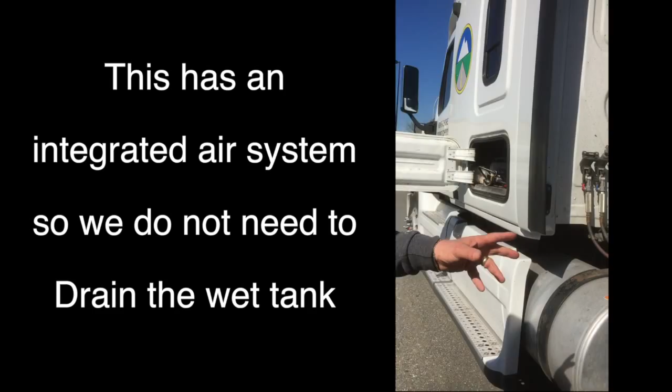As we walk back, one of the things we have to mention is this has an integrated air system, so there's no wet tank to drain. This is an integrated air system. There's no wet tank.

Now we're going to grab our pry bar, we'll shut that up, and we're going to open the hood. Here's how we open the hood. We just pull that like that, and then flip them like that. Of course, we've got to do the one on the other side. And now we're going to open up the hood. Just put your foot there and pull that up there.

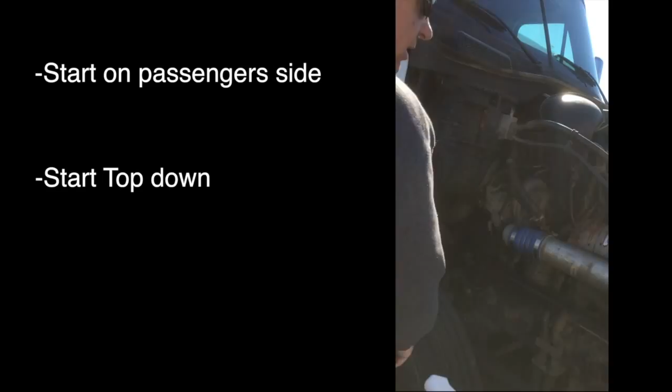We're going to start on the passenger side of the vehicle. What we've got to do is start at the top, work down the engine, along and out and over the axle. One of the things we've got to mention is the fluids.

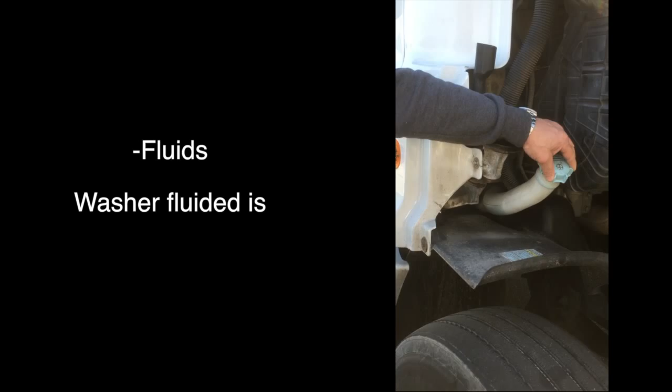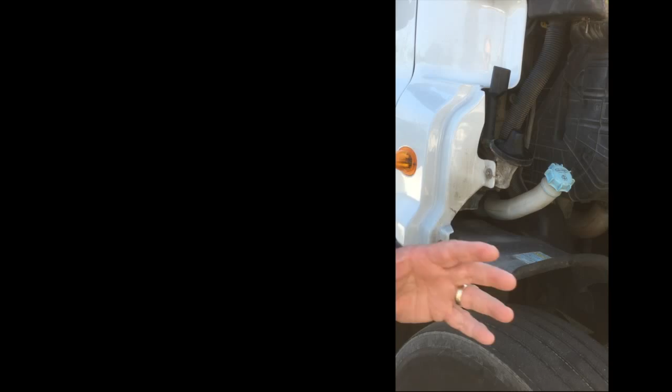On this particular vehicle, we have the washer fluid here, so we're going to say there's adequate fluid there. There's a lot of people who use a lot of flowery language, like 'oh wonderful, no cracks, hoses.' I like to keep it nice and basic and simple. The only three words you're going to need are adequate, secure, no damage. So I'll show you how to do it.

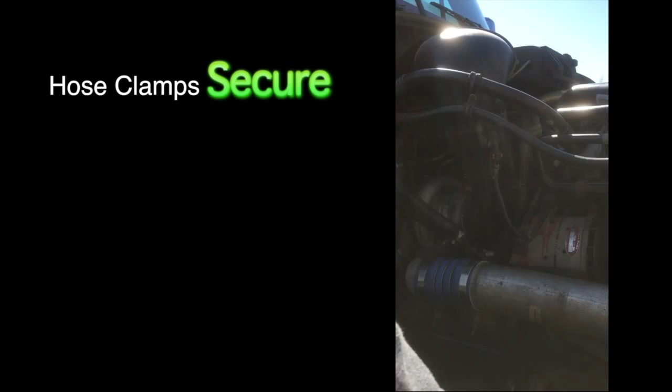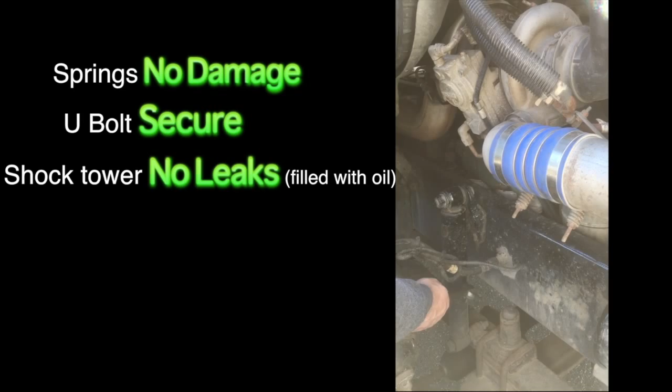So first of all, our starting point is radiator is secure, hoses secure, no damage. Fan blade has no damage, belts correct tension with no damage. There are no leaks on the side of the engine. Hoses and clamps are in place, no leaks. Frame, no damage, all the bolts are in place. The springs, no damage, the U-bolts are secure. The shock tower has no leaks because it's filled with oil.

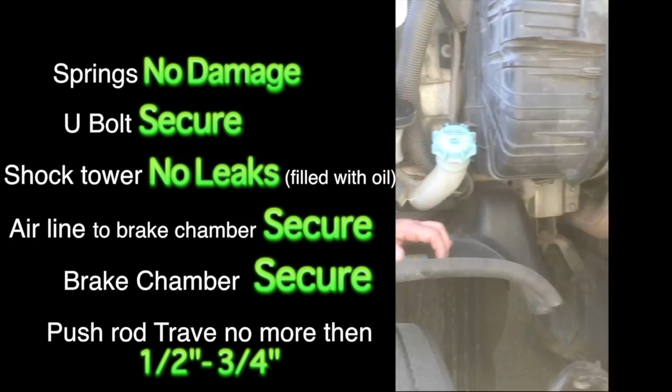Airline to the brake chamber is secure. The brake chamber itself is secure, and of course the push rod travel is half to three quarters of an inch. The inner tyre wall and rim has no damage. We have adequate pressure and at least 3 millimeters of tyre wear. The outer tyre wall has no damage, the rim has no damage, all lug nuts are present and secure, and you must touch each one of them, and there are no leaks from the hub.

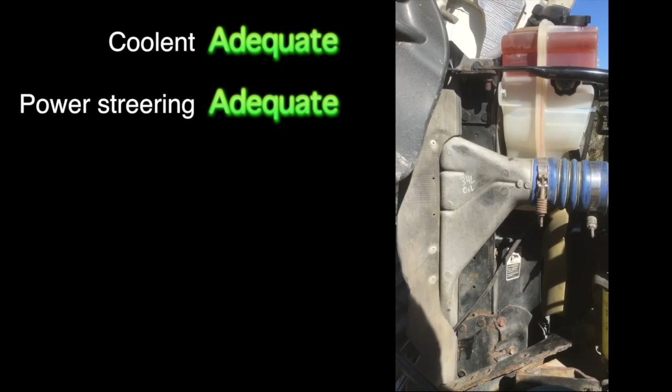See how I work down there? Then we're going to go to the other side. We have to do all the fluids, so we might as well do them now and get them out of the way. So coolant is adequate, power steering is adequate. We take that out, we wipe it, dip it, and say the oil is adequate.

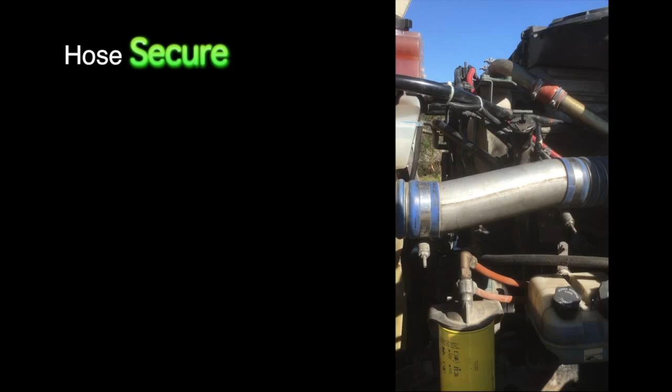And we're going to start at the top again by saying the hoses are secure. In there's the compressor, no damage, it's secure. Airline is secure, other airlines secure. Minimal free play on the steering column. All other steering components, because that's what's on your list, secure, no damage.

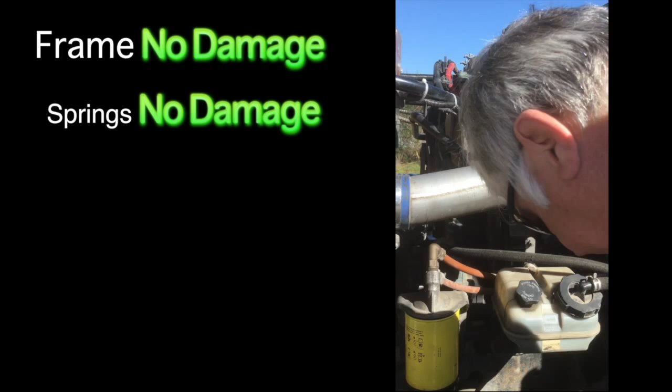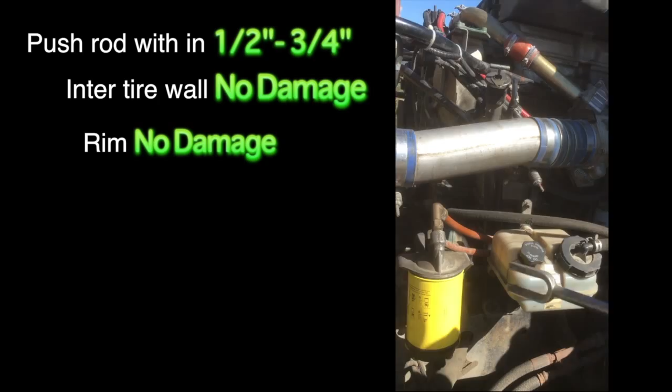Then it's frame, no damage, springs have no damage, U-bolts are secure, shock tower has no leaks, airline to the brake chamber itself and the push rod travel is half to three quarters of an inch. Inner tyre wall no damage, rim no damage. Adequate tread and pressure, don't have to say 3 millimeters again because we said it on the other side. Outer tyre wall no damage, rim no damage, all lug nuts are present and secure, and there are no leaks from the hub.

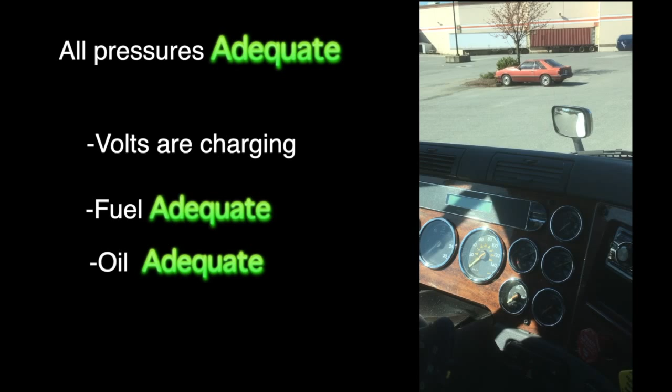Can you see that? It unloads between 105 and 135. As soon as we start the engine, we will say oil pressure's adequate. Don't start it, leave it off, or talk it through. We'd say oil pressure's adequate, volts are charging, and fuel is adequate. We would then push the four-ways on, make sure they're working. We do it all together, don't we?

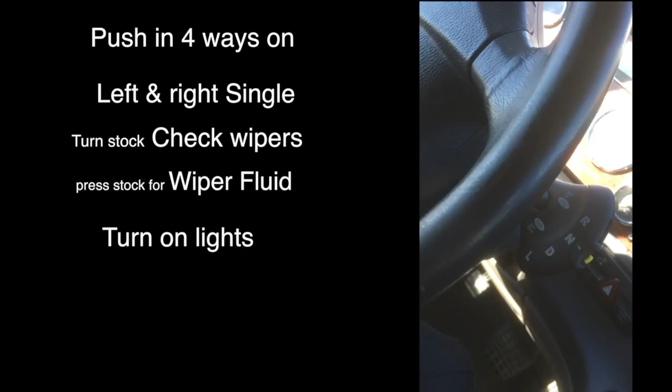We're going to put the left and right signal works on the stalk, turn the stalk and the wipers will work, press it and the washers will work. Then we'll move our hand forward and turn on the lights, which are on the left hand side of the dash. Can you see it down there?

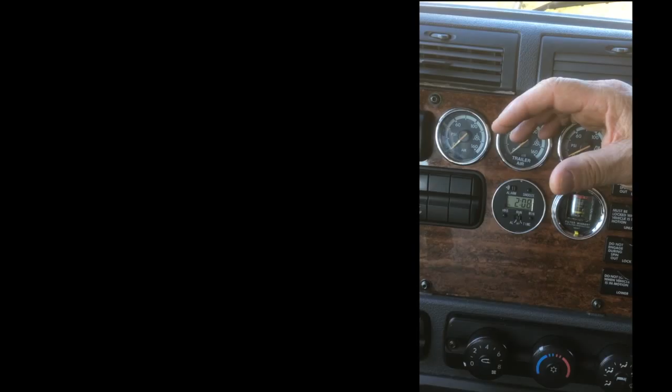We put the lights on and check that the dash lights are working by putting our hand over it like that. Then finally we turn on the demisters and feel for them working and say the demisters are working. At about this time you're going to hear the governor unload and you would say governor has unloaded.

Then you're going to come up here and say secure on your side. You're going to say the lights are working. Then you'll open up that one and say in here is my insurance and registration documents. My hand's already up there, so I blow on the air horn, the city horn.

The steering wheel is secure, the seat is secure, the seat belt works, and ask the examiner to put their seat belt on. Then finally from your side we'll go: window has no damage, mirror has no damage. Windshield has no damage, window has no damage, mirror has no damage. You've got 2 buttons on there, just put the windows up and down an inch, windows are working, okay?

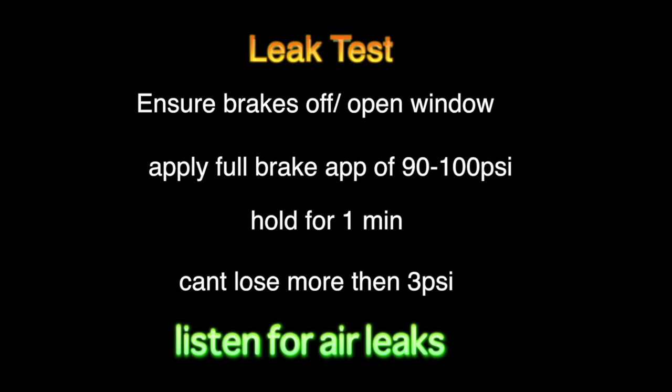Hood has no damage, grille has no damage. Marker light working, headlight working. Headlight working, signal light working. No new damage to the bumper. License plate is present with a valid decal.

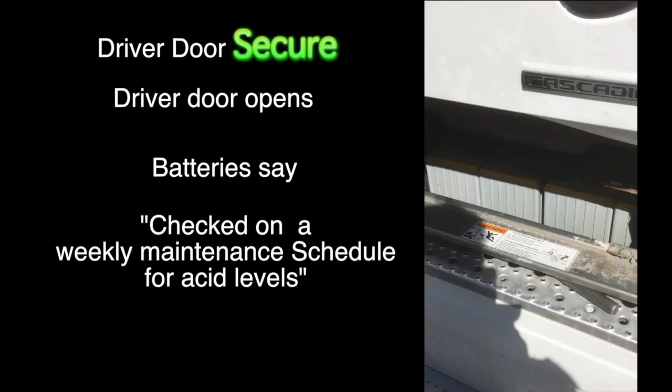Corner mirrors are secure. Overall there's no damage. Window and door are secure. Driver's door is secure. Driver's door opens, closes. Batteries are under here, checked on a weekly maintenance schedule for acid level.

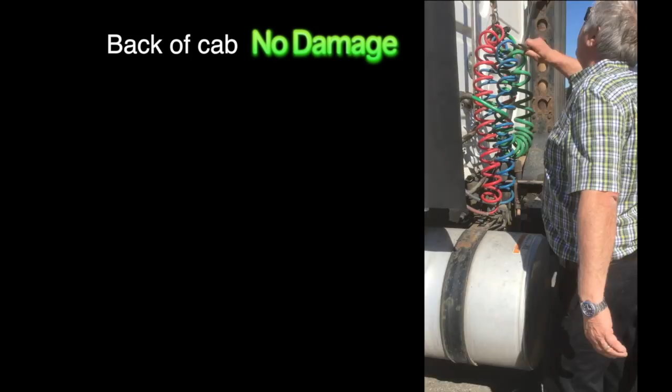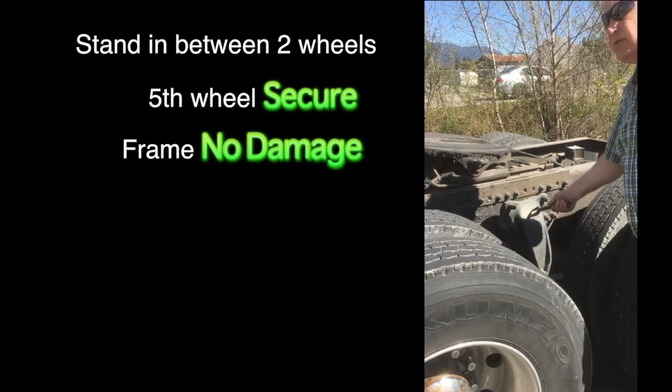We come now, we stand in between the 2 wheels. The 5th wheel is secure. There is no damage on the frame. All 4 tyres have adequate pressure, at least 1.6 millimeters of tread.

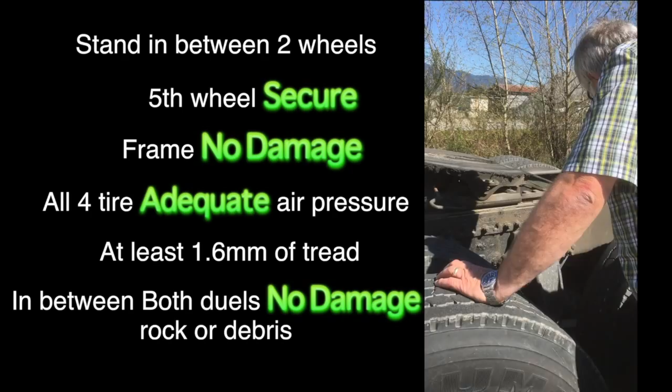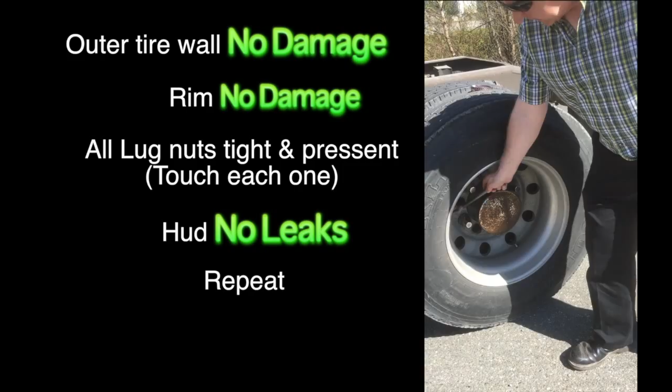In between both dualies, there is no damage, rocks or debris. The outer wall has no damage, the rim has no damage. All lug nuts are present and secure, and there are no leaks from the hub. Finally, mud flap is secure.

Towards the front, there are going to be no leaks from the back of the engine. The fuel tanks, big silver ones, are secure with no leaks. The air tanks, the long black ones, are secure. The plastic lines in the chassis are secure. Above your head is a drive shaft. We're going to tap that and say it's secure, the drive shaft along there.

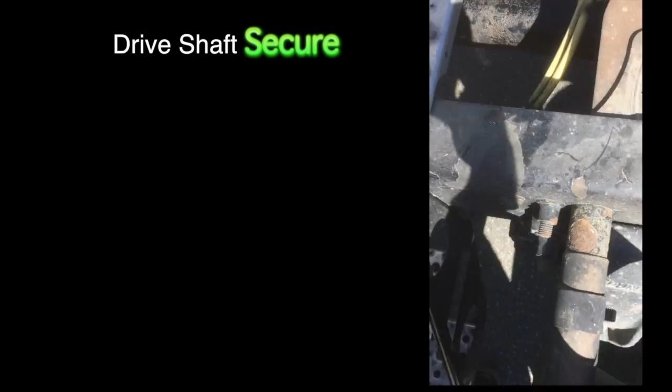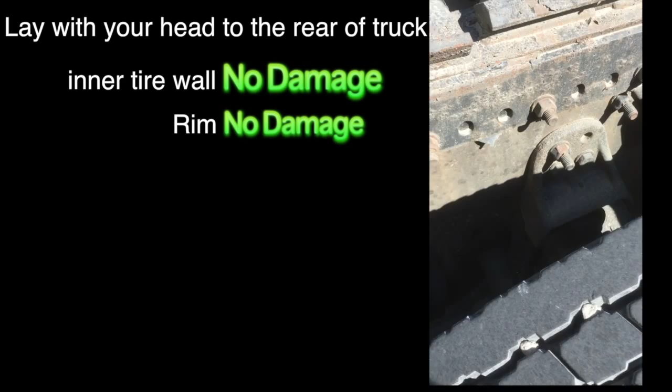We will now be lying with our head here and our feet facing down. We're going to start on this side and go: inner tyre wall and rim has no damage. The next bit in is suspension. To save saying springs, U-bolts, etc., I'm going to say all suspension is secure, no damage. Then I'm going to do airlines to the brake chamber, the brake chamber itself, and the push rod travel is 1/2 to 3/4 of an inch. In the middle is a differential, it's full of oil, so we're going to say the diff has no leaks.

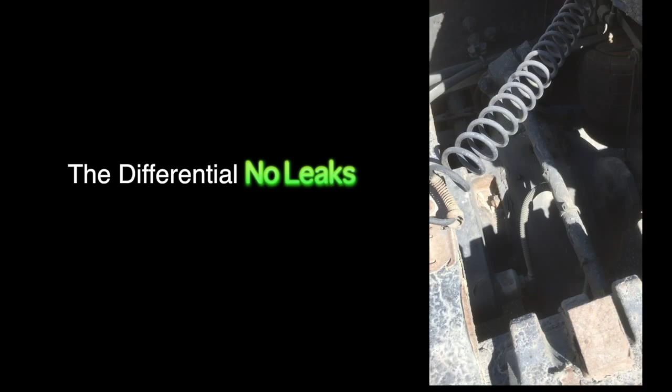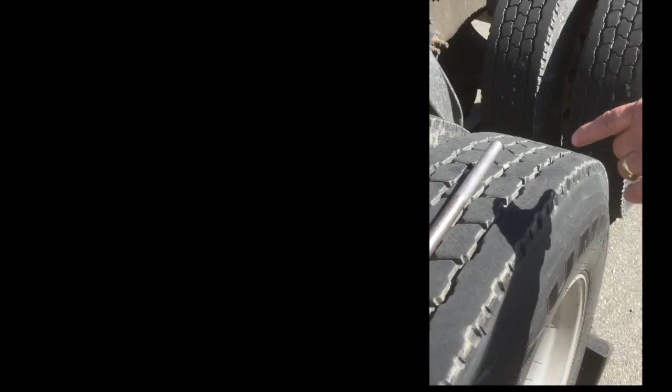After that you're then going to pull yourself underneath. As you come underneath, you're going to see 2 airbags like that. You're going to say they're inflated. Then you'll pull yourself on through and there's another little drive shaft there. You're going to tap that and say it's secure.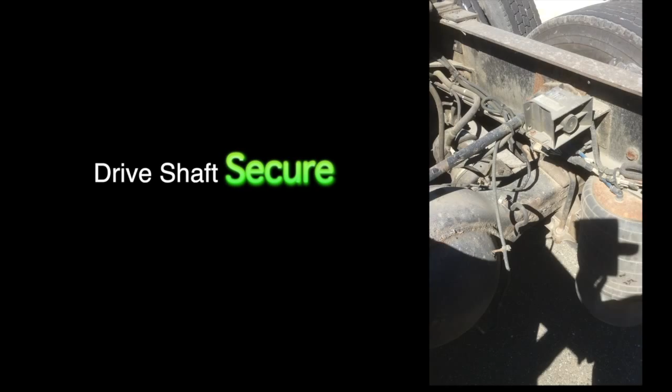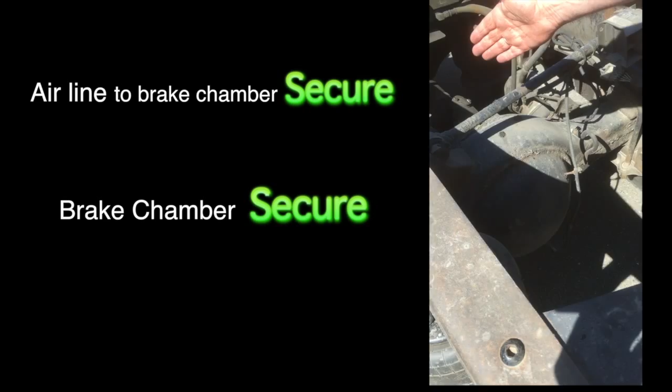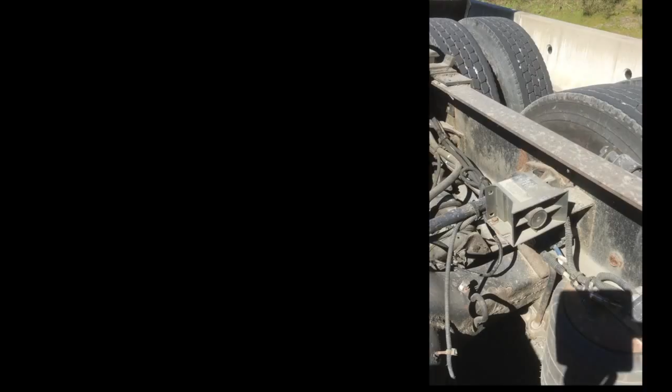Differential has no leaks. Then we'll turn over, do exactly the same. Inner tire wall has no damage. Rim has no damage. All suspension is secure, no damage. Airlines to the brake chamber is secure. The brake chamber itself is secure. And the push rod travel is 1/2 to 3/4 inch.

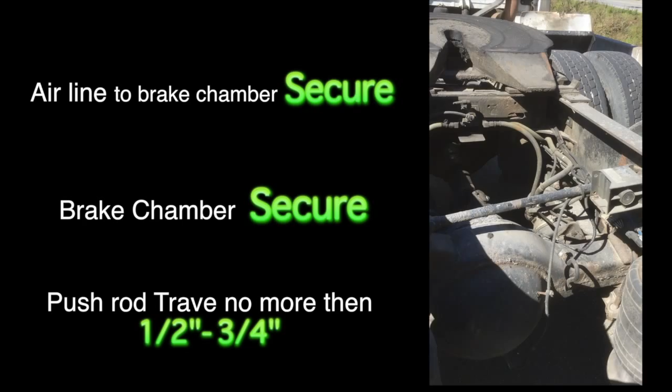And you'll pull yourself out. As you come out, you'll have 2 more airbags that are inflated. We'll have a license plate that is present and lit.

We have a left signal working and a right marker light working. Okay, so now I'm going to go in the cab.

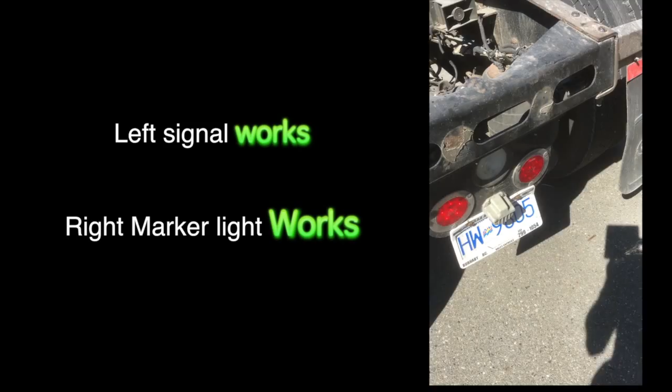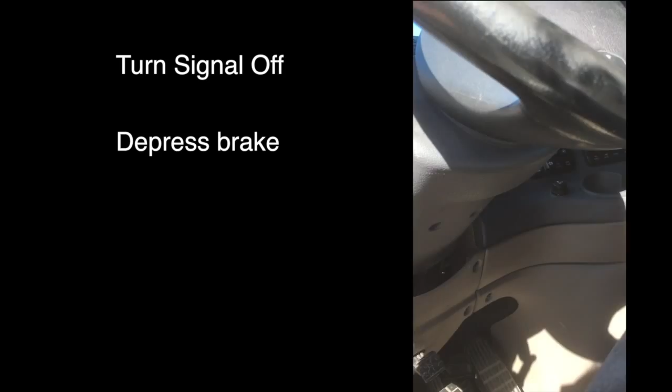I'm going to turn the left turning light off. I'm going to ask you to check my brake lights. I'm going to depress the brake and then put the light onto the other side. Signal light, and then put the signal light on the other side. Okay, I'm turning off the signal light. I'm depressing the brake. Brake works. I'm putting on the right turning light, and it works.

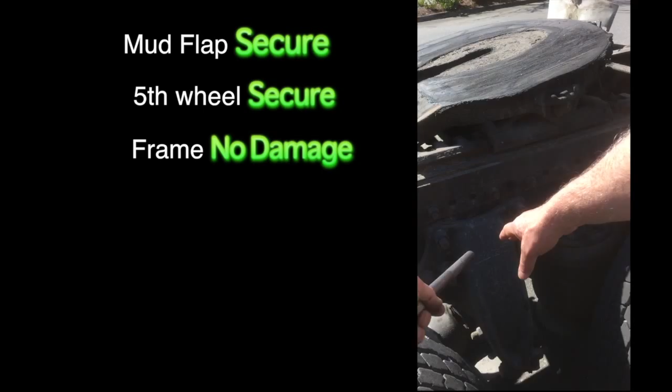Again, same as we did on the other side. Mud flap secure. Fifth wheel secure. Frame, no damage. All 4 tires adequate tread and pressure.

All 4 tires adequate tread and pressure within spec. You don't have to say 1.6 again, as long as you said it that once.

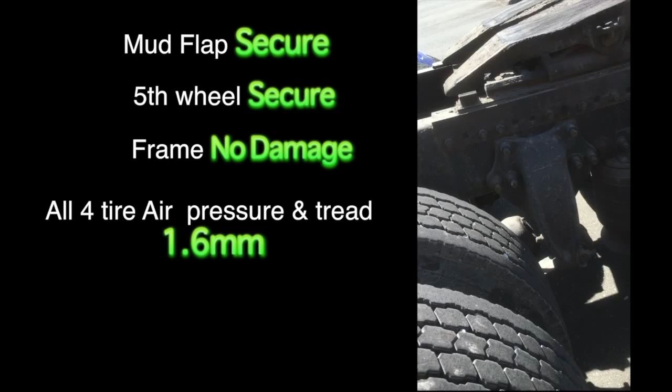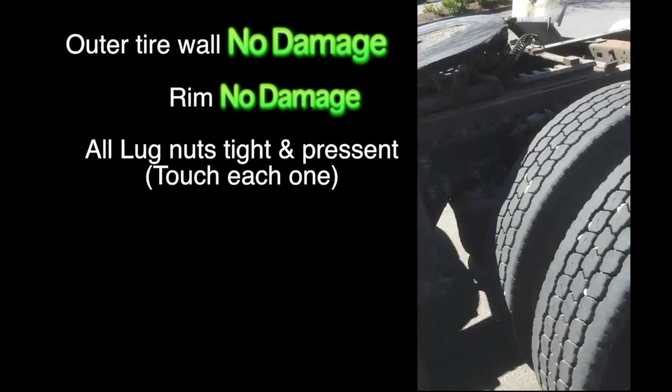All right, then in between the dualies, no damage, no rocks and debris. Clear debris. Outer tire wall and rim no damage. Lug nuts, touch each one of them. All there, no damage. Hub, no leaks.

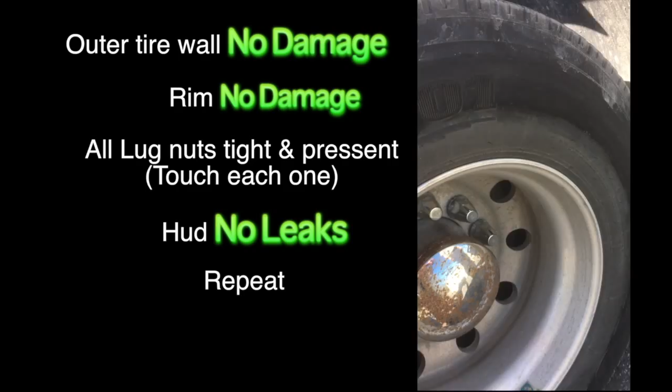Same again. Outer wall, no damage. Rim, no damage. All lug nuts are there. Rim, hub, no leaks. Mud flap secure. Chain hangers secure. Exhaust secure.

Then we come to the side. No visible damage. Window, door secure. Mirror secure. And when you do the mirror, it's a good reminder to go and check the decal is in date. So mirror secure, decal in date.

Driver's door secure. Passenger door opens and closes. Lift that flap down, now we have the fuel cap secure. Steps are secure. Signal light working. Mirror secure. And when we return to the front, the only thing different, of course, is the signal light's working.

Now, at this point, the next thing we're going to do is take the chocks out. So what are we going to do first? We've had 4 people in the last 12 months do all that, so excited, they finished, ripped the chocks out without putting a brake on. Guess what that is? Fail. Dangerous action. Because not only that, sometimes they put you off by asking you how do you adjust a manual slack adjuster.

Because these are all automatic, you check to see if it's out, noting which way the S cam turns, then turn it in that direction, then back it off a quarter to half a turn. So when we finish at the front, make sure the brakes are on and chocks out.

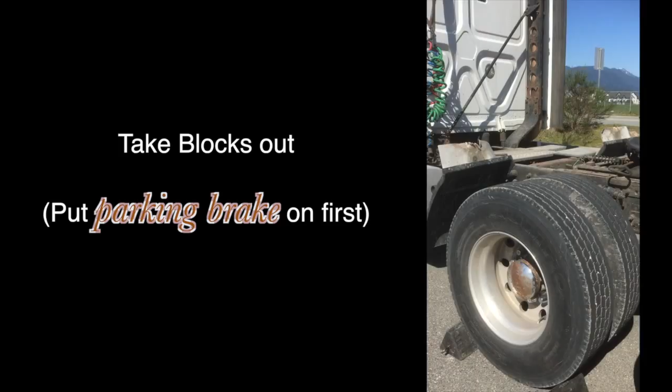That's the next bit. So I'm gonna apply the emergency parking brake. Let's open the box and we'll put everything back in now. The hook. And then I'm going to remove the chocks.

What do we do with the hook? I put it on top. I'm going to start the cab.

Then I'm going to do a parking brake test. So I'm going to leave the parking brake on, I'm going to put it into gear, and then I'm going to let off the brake and give some gas. We rock and roll, I don't feel any movement. Parking brake works. I'm going to release the parking brake.

Now I'm going to pull it forward 6 inches. I'm going to apply pressure on the brake. The brake works. Then put the parking brake back on.

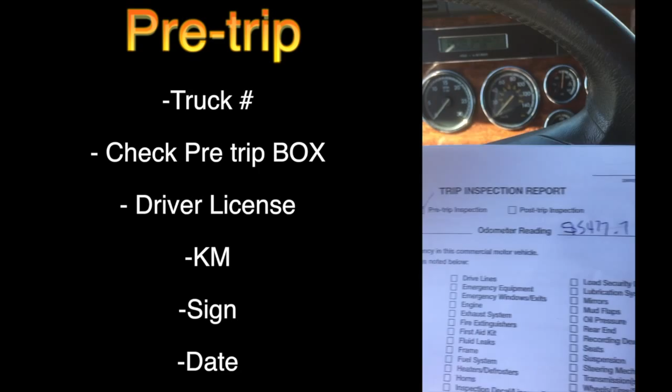Then I'm going to put the parking brake back on, and put it into neutral. And then I'll kill the cab. And I will do my pre-trip inspection where I will write the tractor I'm in, which happens to be an F6, my driver's license number, my odometer reading. I will sign 3/4 of the page down and date.